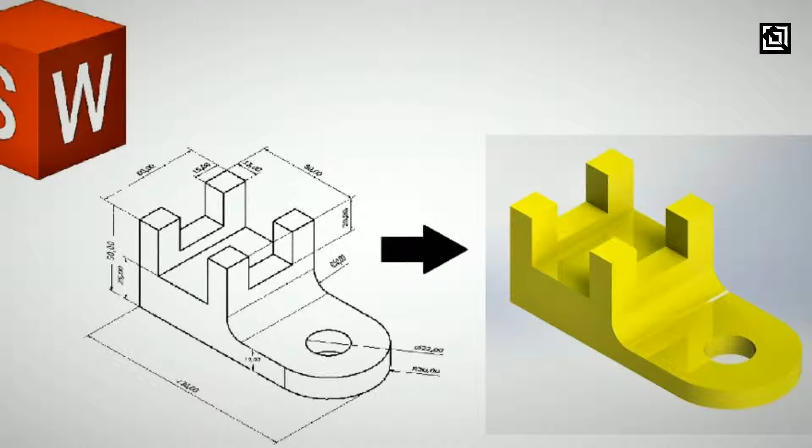Here we have our SolidWorks and the 2D diagram of the 3D part model that we are going to draw now. We are going to complete this part model in just 3 steps. The first step will be the extrusion of the front view to a length of 60 mm. The second step will be the cut extrude of this rectangular part from either side. And the third part will be the cut extrusion of the hemicircular part and the circle cut that we have inside of this.

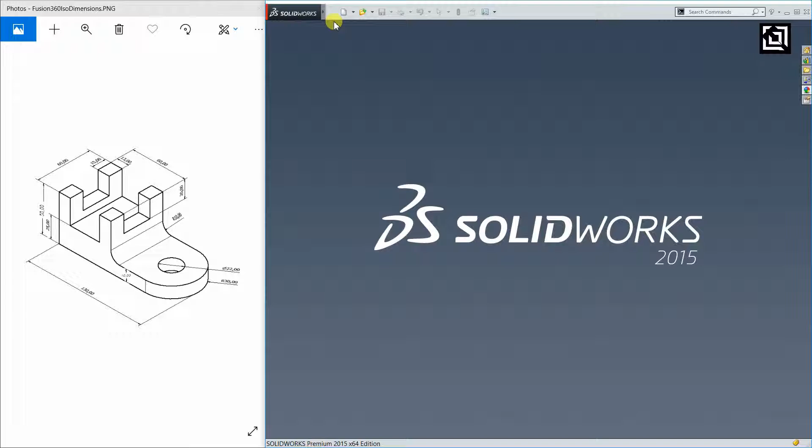Let's start our SolidWorks with the new part model. Since it's in the front plane, I'm taking the front plane as normal, and I'm taking this point as origin now, and I'm starting from here. Here we have a vertical length of 50 mm, and towards right they have made as 13.

From here to here, this part they haven't given directly, but from this part to here they have given 20. Since the total height is 50, and from here to here is 25, so 25 plus 20 minus 50, which is minus 5. So this length is supposed to be positive 5.

So from here to here it's 25, and from here to here it's 13, and from this part to here they have given 60. So obviously this length should be also 13. So 60 minus 13 minus 13, which is 34.

I'm going towards horizontal 34, and again towards up 25 and 13, and here the length they have given us 10, which is like 50 minus 10, then towards downward 40, and the total length they have given us 130. So 130 minus this length 60, which is 70. I'm going towards right 70 mm.

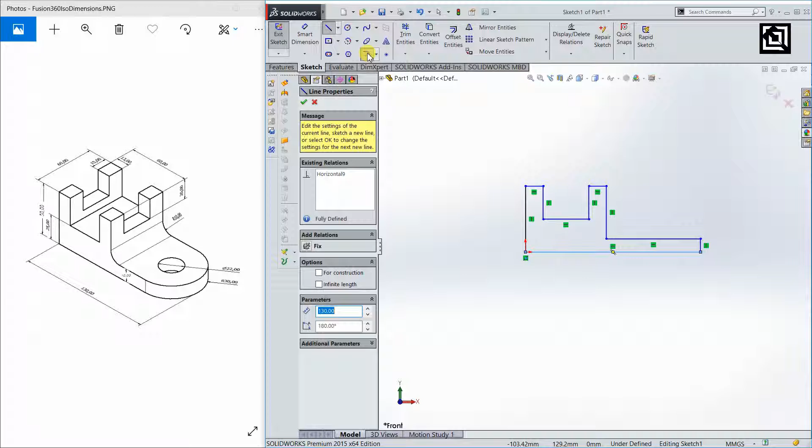I'm closing the contour now, and here they have given the fillet radius of 10 mm. I'm just going to draw that now. So here we have made a radius fillet of 10 mm, and now the only work that we have remaining to complete this part is just to give extrude

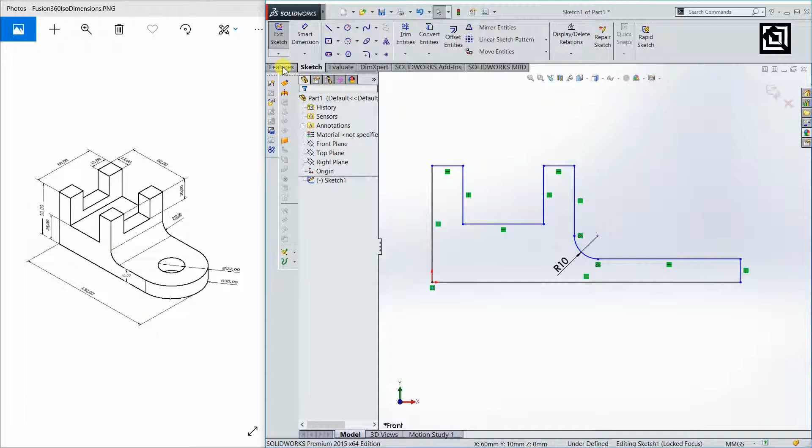of 60 mm. I'm just making it as mid plane since they are symmetric about the front plane now. And the second part that we are going to do is the cut extrude of this rectangular part.

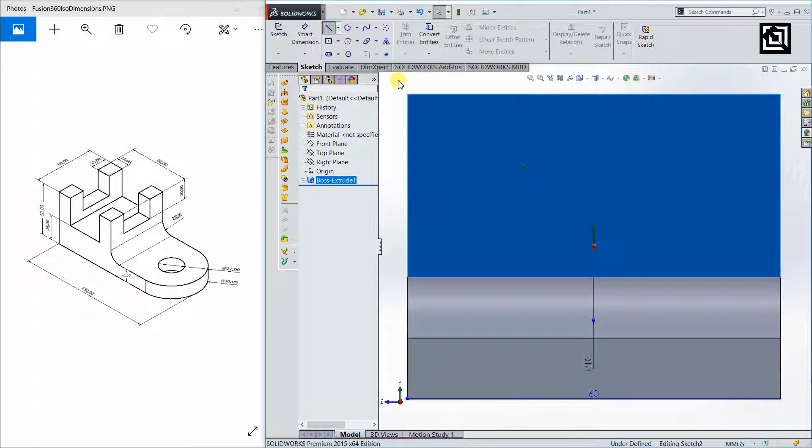Taking here, the length of this part is 15, then obviously this should be also 15. So 60 minus 15 minus 15, the length of this part, is supposed to be 30. So now what I'm going to do is, starting from this center part, I'm going towards right 30, divided by 2, 15. Then from here to here we know that it's 20.

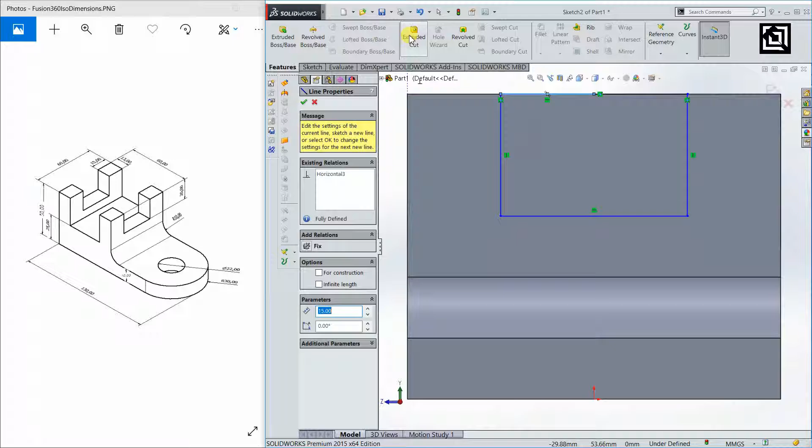Then towards left 30, and completing this part now. I've completed the geometry of the closed contour, then extrude cut. Until here we have made extrude cut. The total length is 60. We are done with the second part now.

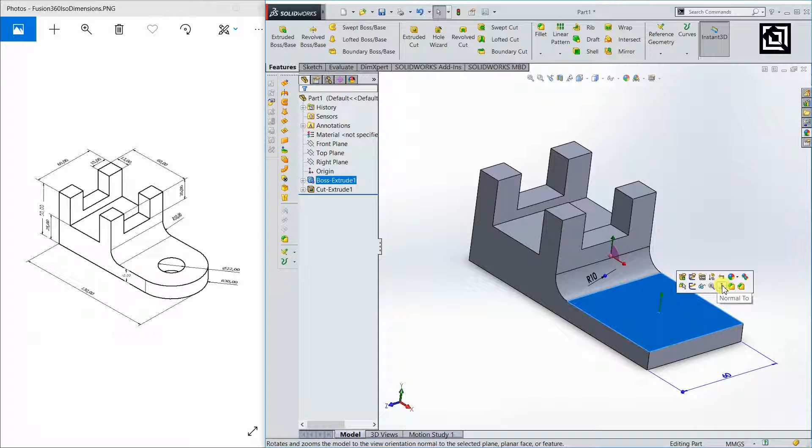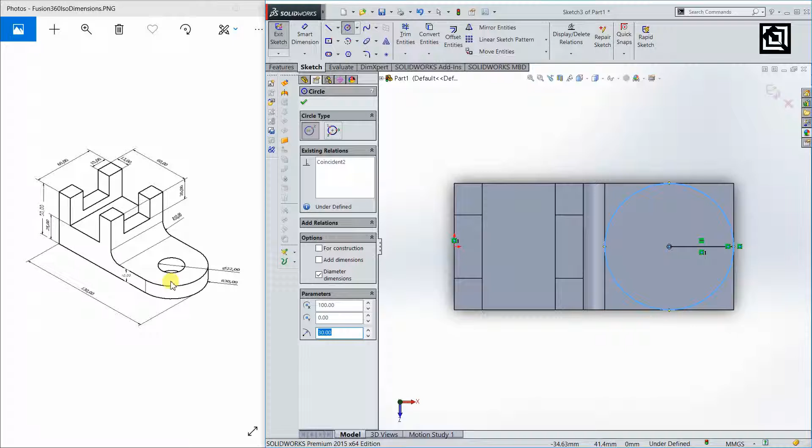The third part, the last part that we have remaining, is to cut extrude this circle and the hemisphere that we have here. So what I'm going to do is take this plane as normal, and they have given the outer diameter, the diameter of the outer circle as radius 30. So from this center point I'm going towards inside 30, and I'm going to draw the circle of 30 mm radius, and the inner circle they have given the diameter as 22.

We are done, and now we have the cut extrude of the half circle we have here. We need to make a closed contour on the other side, on the outer side. I'm just making a normal, random closed contour, and I'm just deleting this half of the semicircle that we have here, and also these are the unwanted parts that we have.

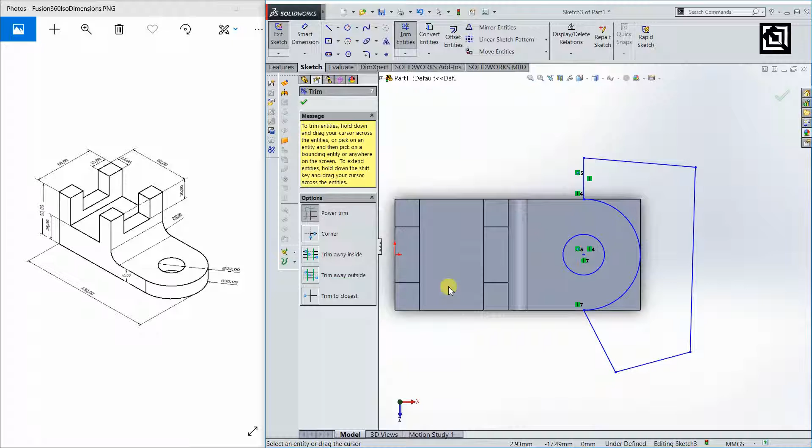Now we have these two closed contours with which I'm going to extrude cut now. It's automatically selected the two closed contours that we have made just now. And yes, there we are done with this 3D part model in just 3 steps.